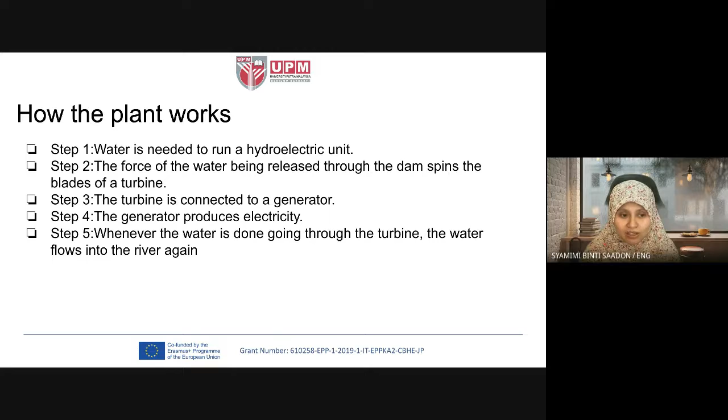Whenever the water is done going through the turbine, the water flows into the river again. The turbine spins, the blade of the turbine spins, and the turbine is connected to the generator to produce electricity. Thus the rest of the water will flow again into the river, and the cycle continues. That's generally how hydropower works.

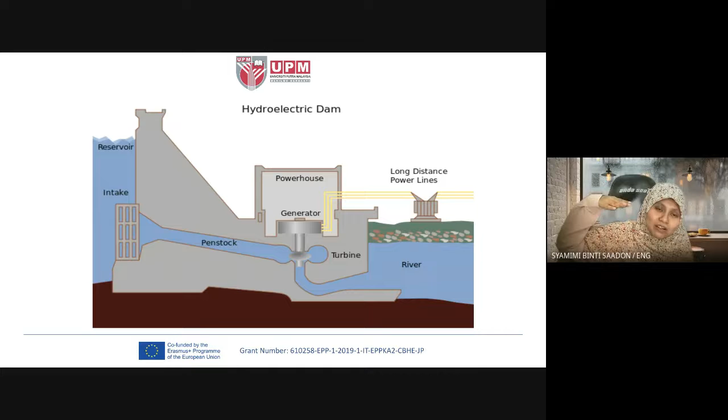So this is a presentation as an example of a hydroelectric dam. From the reservoir at a higher altitude, the water will flow and cause the turbine to spin. The blade of the turbine will spin, and the turbine is connected to a generator, thus it will produce power.

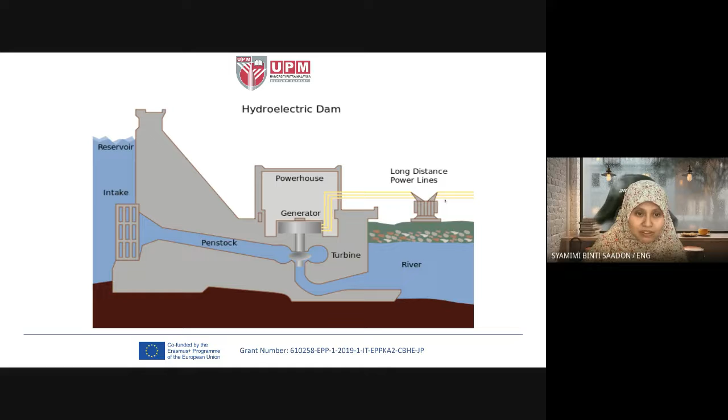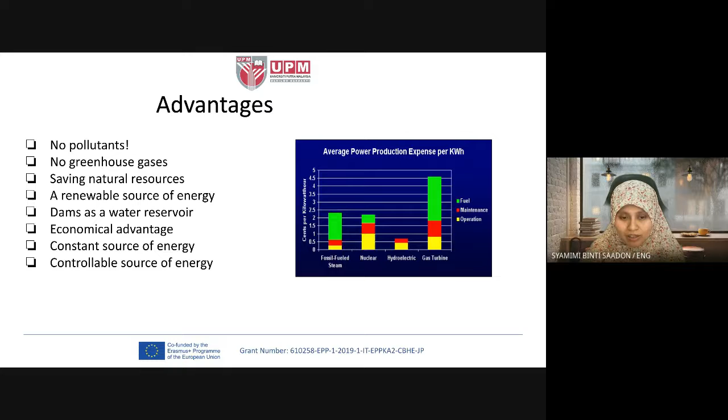If you compare the average power production expense per kilowatt hour with fossil fuel, nuclear, gas turbine, hydroelectrics basically use fewer cents per kilowatt hour, due to the maintenance and operation cost. It doesn't need any fuel.

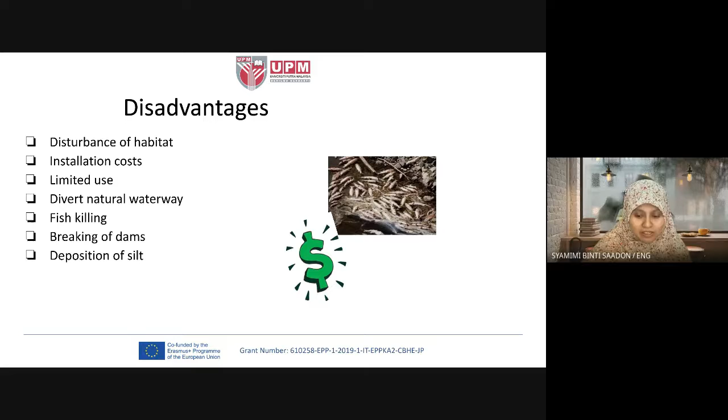Three Gorges Dam located in People's Republic of China, the largest dam in the world, spans the Yangtze River with all of its 32 generators. It can produce 22,500 megawatts, so it's actually 22.5 gigawatts. It caused problems because it flooded over 1,300 archaeological sites and 1.3 million people had to be relocated. That is the disadvantage of this hydroelectric power plant.

It caused flooding. Another one is between Brazil and Paraguay, in South America, the Itaipu Dam.

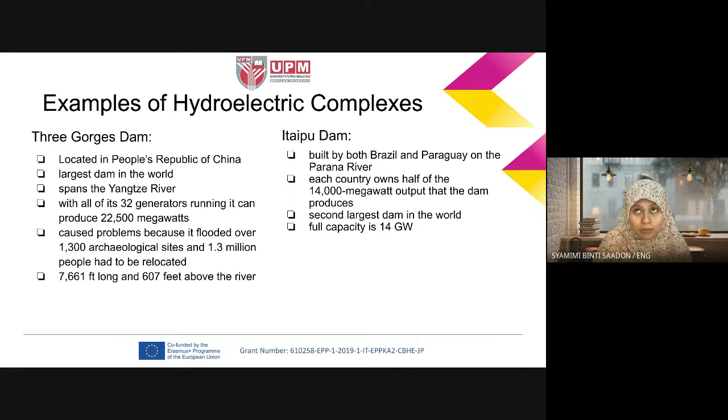This hydroelectric power really depends on gravitational force. A higher level of altitude means higher stored energy, higher potential energy. The higher it is, the more stored energy it has. So water must fall from a higher elevation to a lower one.

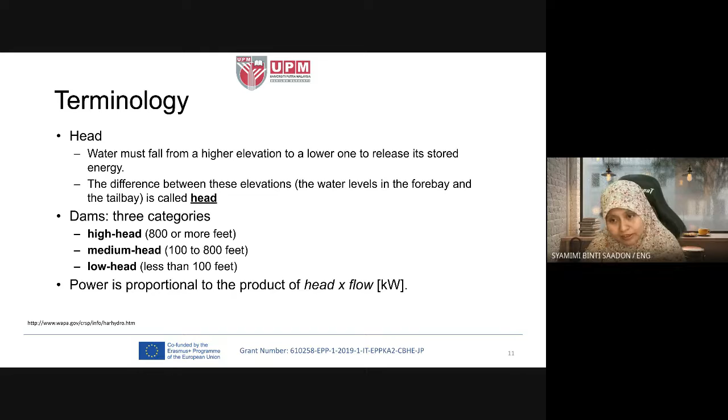Dams, or 'empangan', have three categories for hydropower. 800 feet or more is what we call high head, medium head is around 100 to 800 feet, and low head is less than 100 feet.

How do we calculate the power produced by hydroelectric? The power is the product of head times flow. Flow is normally in meter cube per second, and head is in meters, representing the elevation height.

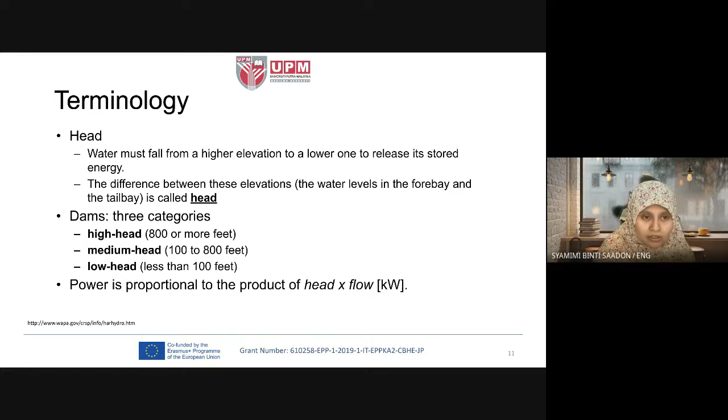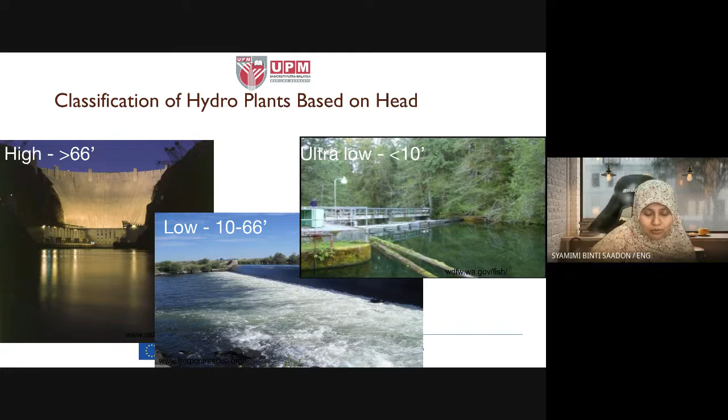This is an example classification of hydro plants based on head. In these figures we have high head at 66 feet and higher, large dams, then lower dam, and ultra low, low dam. You can see the elevation here, how high it is.

Types of hydroelectric installation. Different head, different elevation of head, means different types of installation. Different head elevation means different installation designs.

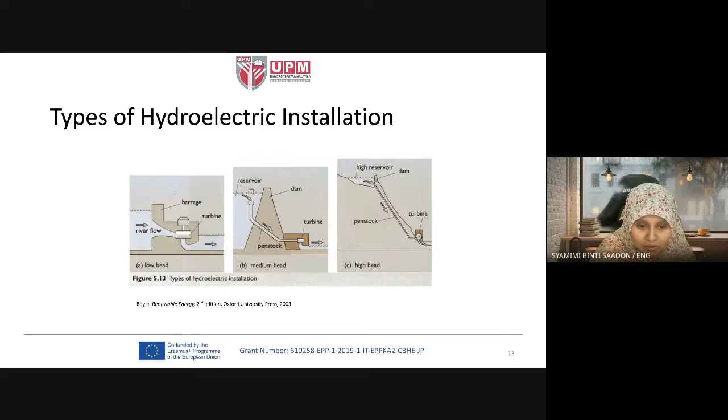The first one is low head, which is kind of direct from the river to the turbine, continuing to flow down to the river. Medium head needs a penstock to flow the water from the reservoir, and the high reservoir type is like this. So the installation is quite different depending on the elevation level of the dam.

Just now was about the level of elevation. This next part is about the scale of hydropower produced, ranging from large to pico. We seldom hear about pico hydro. Large hydro can produce around 100 megawatts into a large electricity grid.

The two examples mentioned previously were in China, and in Paraguay and Brazil in South America. Those are examples of large hydro, of course.

Medium hydro produces around 15 to 100 megawatts, small hydro 1 to 15 megawatts, and then there's mini hydro, micro hydro, and pico hydro, depending on the application.

This is an example. Hydropower is used in two ways: direct or electrical generation. Direct means the energy produced by the water, stored from the water, is being directly used for any application.

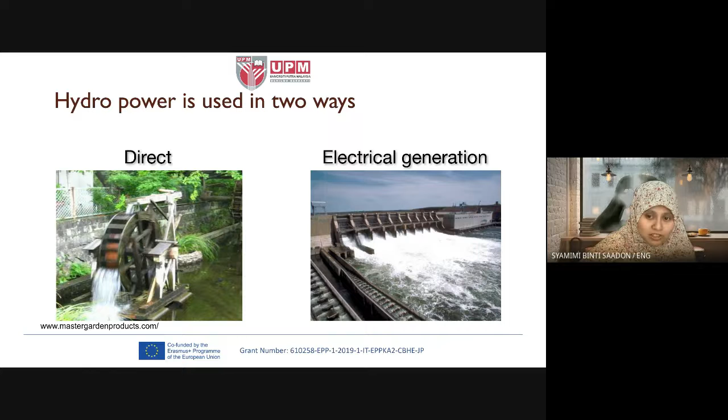Electrical generation means the energy from the hydropower runs through the turbine, and the turbine is connected to a generator, which then produces electricity.

This is some of the direct use of hydro energy, basically in rural areas, for textile manufacturing - for making fabrics, we can use hydro energy for this.

And then for grist mills, grist pasir, kilang buat pasir, manufacture pasir, and then we also have kilang papan, sawmills, which can use direct hydroelectric power. Okay, and then we also have irrigation, sistem pengairan, for penyaluran air, basically in the rural areas, so they can use this direct use of hydro energy to supply power to manufacture textile, grist, pasir, sawmills, kilang papan semua.

Okay, and types of hydroelectrical generation. Kalau hydroelectric power using hydroelectric generation, first of all is the impoundment, macam sistem penahanan air tu. Pump storage capacity, run-of-river, diversion. So basically yang besar-besar sikit lah. So these are the examples.

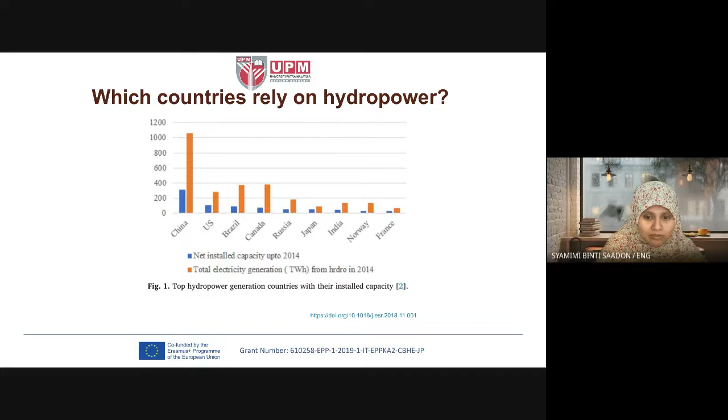Okay, so which countries really rely on this hydropower? So basically first one is China, US, Brazil, Canada. Some of the European countries, Russia, Asia Pacific, Japan, India, Norway, and France. So those are the top hydropower generation countries with their installed capacity, as of 2014. This one is the latest that I have found, maybe there are some more latest. So around... terawatt hour, this one.

Okay, so basically what I wanted to focus on is the hydropower due to water dekat empangan sungai, but I include a bit since the source is the same, which is water. So I include here other potential new sources of hydroelectricity, which is tidal and wave. But actually tides and wave jatuh di bawah ocean energy sebenarnya. Ocean energy, not basically, it still can be considered as hydropower sebab hydro kan, water juga source dia, tapi mechanism dia lain sikit. So basically kalau kita tengok, biasanya tides dengan wave ni dia termasuk bawah ocean energy, not directly bawah hydropower. But it's okay, I just introduce a bit about this tides and wave.

So tides ni macam air pasang surut, pasang surut air kan, and wave pula ombak lah.

Okay, so tide power. Pasang surut air ni boleh generate renewable energy source juga, based on daily movement of water in oceans. Tide dengan wave ni datang daripada ocean. Walaupun dia still water, air, tapi tide dengan wave ni biasanya dekat ocean, dekat laut. Tadi kalau macam hydropower yang tadi kita tengok tu basically dekat sungai, kat empangan. So based on daily movement of water in ocean, kejadian pasang surut air tu boleh menghasilkan power energy.

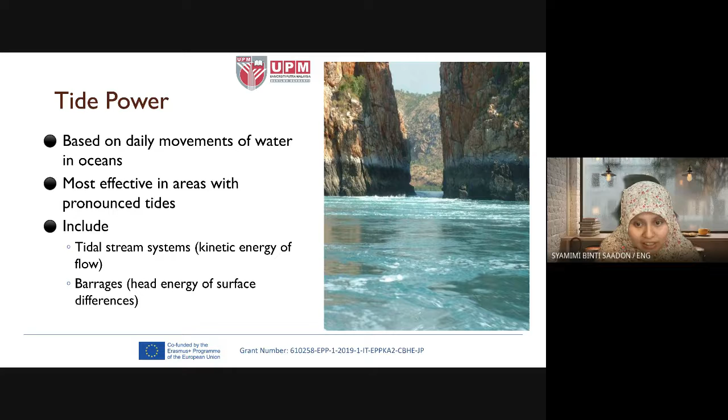Okay, so tide power includes two types of energy mechanism, a source. Dia punca dia datang daripada dua: satu daripada tidal stream due to the kinetic energy, satu lagi daripada barrage due to the head energy ataupun potential energy, ketinggian elevation yang berbeza. Okay, so tidal stream system, this is an example of a system, tidal stream yang due to the kinetic energy tu. Dominant technology is shrouded turbine.

Prototypes have been tested in England, Australia and Italy, outputs up to 1.2 megawatt are noted. Okay, so macam 1.2 megawatt tak adalah banyak sangat berbanding dengan tadi tu kan. Any barrage system depends upon impoundments built along coastlines. Sistem penahanan tu yang dekat coastline developed in Canada, Russia and France. Basically kat negara lain atas tu lah kan. Okay. Largest generates 240 megawatt, so lebih besar, limited by geographic environmental considerations.

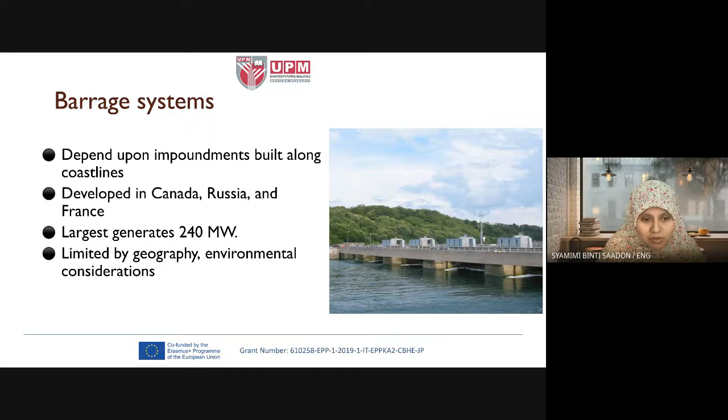And then we have wave, okay, ombak. Power, hydropower hydroelectric due to the wave power. So based on up and down motion of sea surface, so motion pergerakan, kinetic energy can be captured using a device that converts motion to electricity. Once we have a device yang boleh convert kinetic energy ni to electricity, macam turbine tadi, turbine dia convert kinetic energy to electricity kan, bila dia connected to the generator, create more electricity than tidal, so boleh jadi dia lagi dapat banyak lagi. Recently developed a system include around 2 to 3 megawatt.

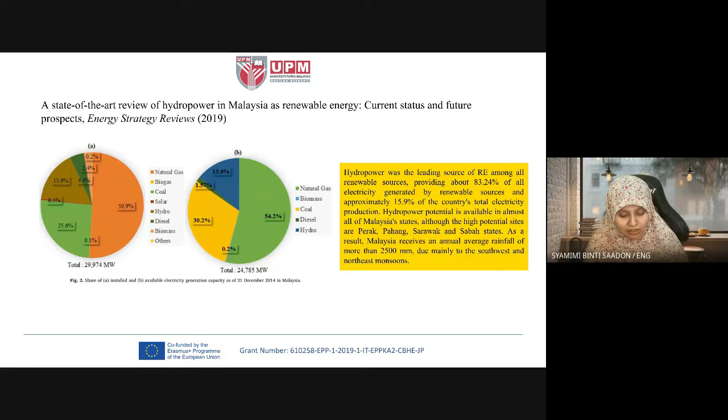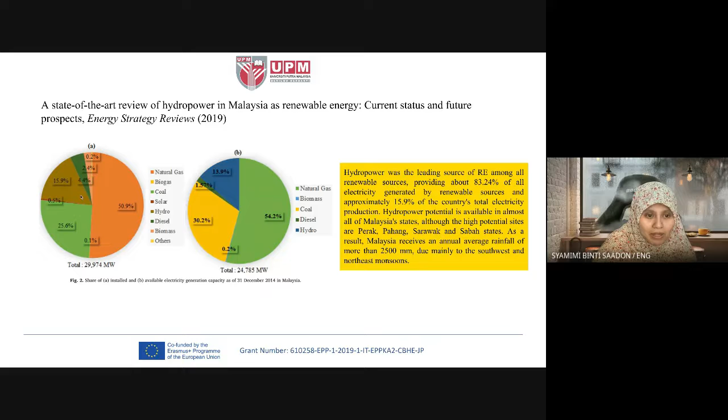So from this paper, journal, a state-of-the-art review of hydropower in Malaysia as renewable energy, current status and future prospects from journal Energy Strategy Reviews in 2019. So you can look at the journal, you can search this journal. So basically if you look at the pie chart here, share of the installed and available electricity generation capacity as of 31st December 2014 in Malaysia. So basically installed electricity generation in our country, majority is still from natural gas. But we can look here, second is coal, but hydropower is third, around 15.9%, which is 16%.

And then available electricity generation. Still natural gas is the majority, and then we have coal and hydro 13.9% or 14% as the third source of available electricity. So hydropower was the leading source of renewable energy among all renewable sources, providing about 83.24% of all electricity generated by renewable sources and approximately 15.9% of the country's total electricity production. Okay, so kalau compare dengan other renewable energy source, hydropower yang leads lah, sebab natural gas dengan coal is not a renewable energy source.

Hydropower potential is available in almost all of Malaysia's states, although the high potential sites are Perak, Pahang, Sarawak and Sabah states. So those are the states that has sungai banyak kan, besar kan. As a result, Malaysia receives an annual average rainfall of more than 2,500 mm due mainly to the southwest and northeast monsoon. So monsoon apa ni? Southwest monsoon, barat daya. And northeast monsoon, timur laut.

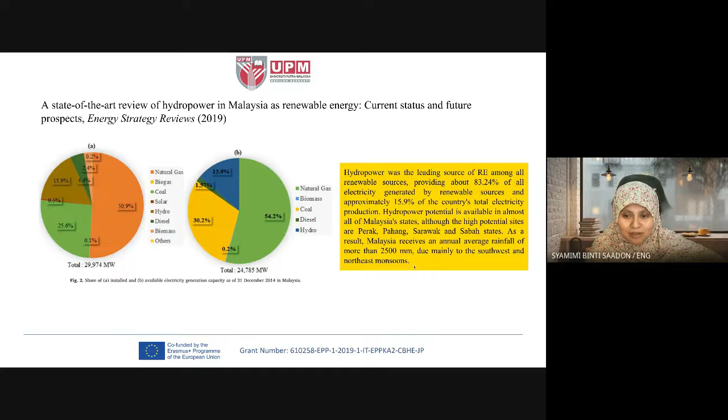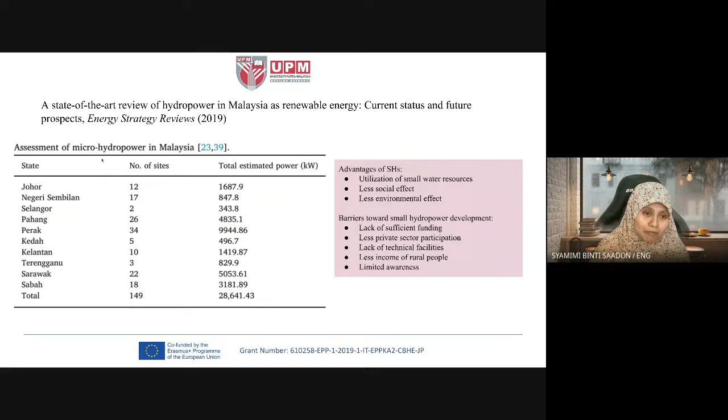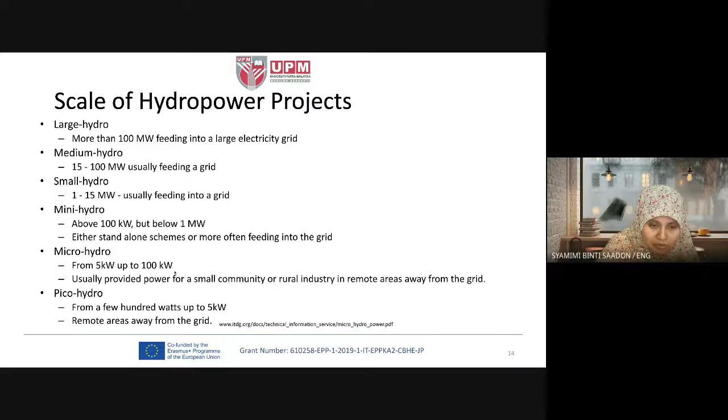Okay, a state of the art review of hydropower, sama lagi. Assessment of micro hydropower in Malaysia. So these are the numbers for micro hydropower. So micro hydropower, the production is around 5 kilowatt up to 100 kilowatt. So tak adalah banyak sangat, but it's okay. Micro hydropower.

Assessment of micro hydropower in Malaysia, number of sites, so ada 12, so banyak total around 150 lah in Malaysia. So untuk micro hydropower kita dah ada quite banyak juga, cuma yang the bigger one kan, yang belum banyak lagi lah. So yang micro hydropower ada banyak dah ni, around 149. So with total estimated power 28,641, which is around 28 megawatt.

Okay. So advantage of small hydropower, essentially utilization of small water resource. So even though we have a small water resource, we still can create hydropower, electricity. Less social effect, less environmental effect. Okay, barriers towards small hydropower development. Apa dia punya disadvantage ataupun not actually disadvantage, but halang-halangan dia.

Lack of sufficient funding. So of course always funding. Okay, like less private sector participation. Kena invite lagi banyak lah NGO dan private sector untuk terlibat. Lack of technical facilities, less income of rural people. Okay, limited awareness.

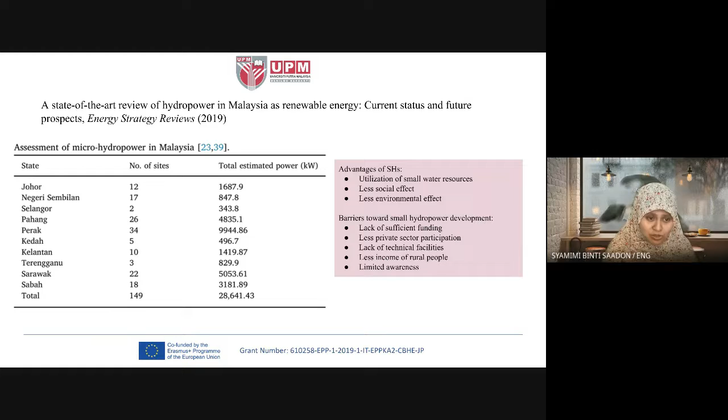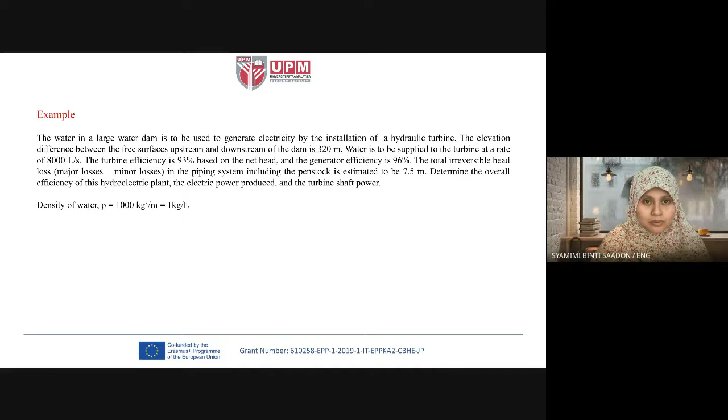Okay, so I have finished introducing to you about this hydropower. So I just have this one example exercise, so that you can understand better how this works. Okay, wait, I'm going to create a whiteboard. Okay, so this is the link for the whiteboard. You can try to go and okay.

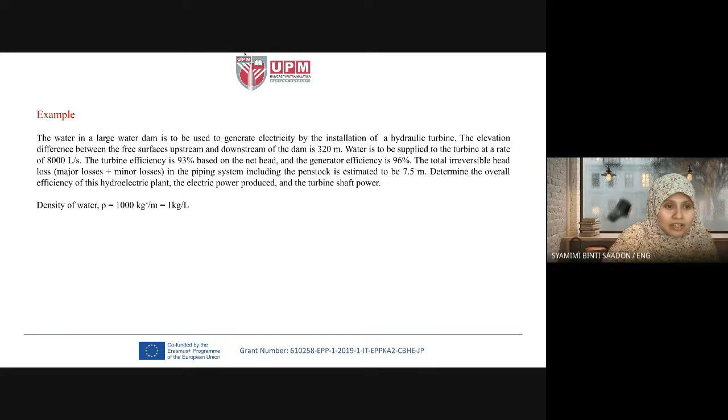Sekejap, sebelum tu, we read first the instruction. The water in a large water dam is to be used to generate electricity by the installation of a hydraulic turbine. The elevation difference between the free surface upstream and downstream of the dam is 320 meters. Water is to be supplied to the turbine at the rate of 8,000 liter per second. The turbine efficiency is 93% based on the net head, and the generator efficiency is 96%.

Okay, turbine tu dia connected to the generator. The total irreversible head loss, major loss and minor loss, in the piping system including the penstock is estimated to be 7.5 meters. So since dia agak tinggi, medium to high level of dam, dia kena ada penstock ni. So ada piping, piping ni ada loss lah. So head loss dia 7.5 meter.

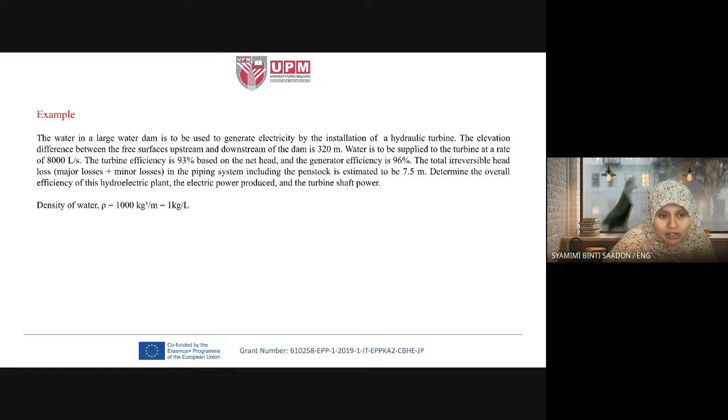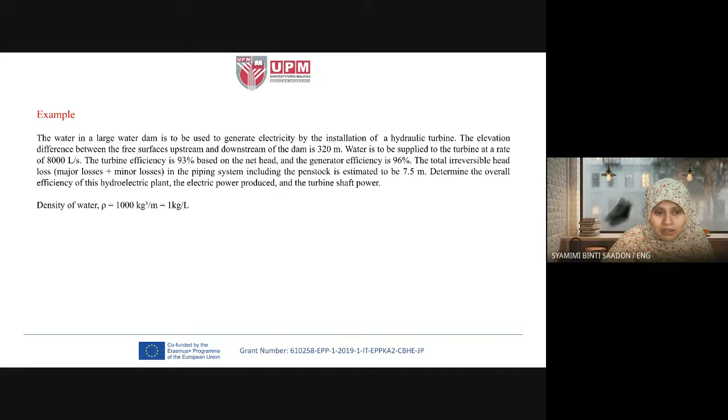Determine the overall efficiency of this hydroelectric plant, the electric power produced, and the turbine shaft power. So there are three things that we need to search for. We use density of water 1,000 kilogram per meter cube or 1 kilogram per liter. So let's look at this example. First, we want to calculate overall efficiency of the plant.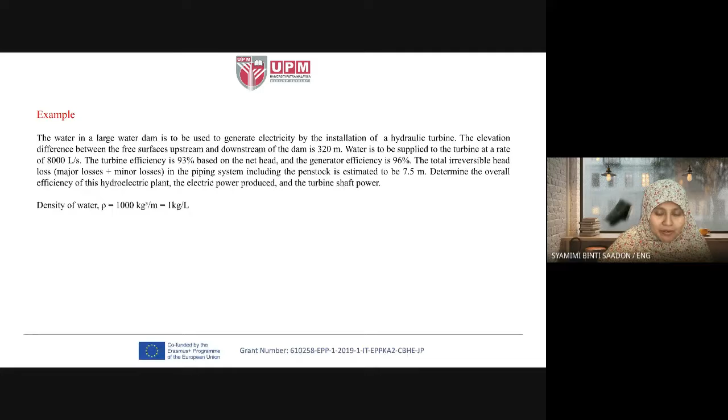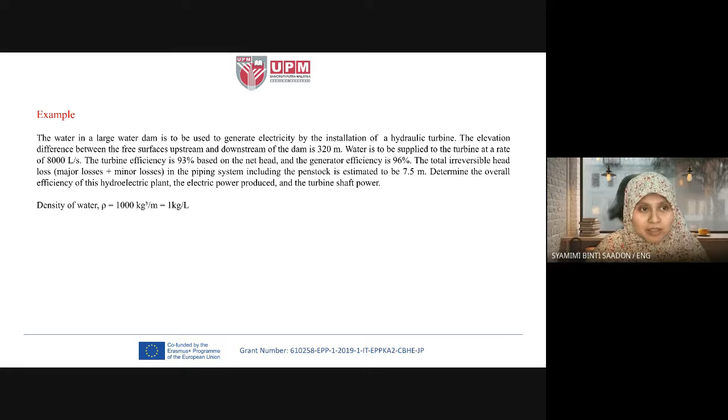We are given with the turbine efficiency and generator efficiency, and we want to calculate the overall efficiency. Normally, for efficiency we multiply. Overall efficiency is the turbine efficiency, generator efficiency, and of course the efficiency due to the piping. So here the turbine efficiency and generator efficiency are given, so settled.

Just that we don't have the efficiency of the pipe. The one that we are given here is the head loss in meter. Kita tak diberi efficiency dia, kita hanya tahu head loss dia dalam meter. So we have to search for this piping efficiency. Since we are given with the head loss, kita tahu yang loss, kita tak tahu yang tak loss. Faham tak? So kita kena tolak.

This is energy due to mechanical loss of the piping, energy loss over the maximum power that can be provided through the piping. I repeat again, since we are given with the loss, 7.5 meter head loss tadi tu.

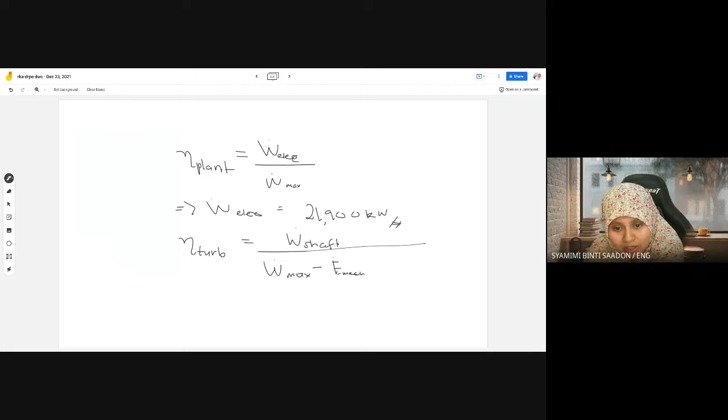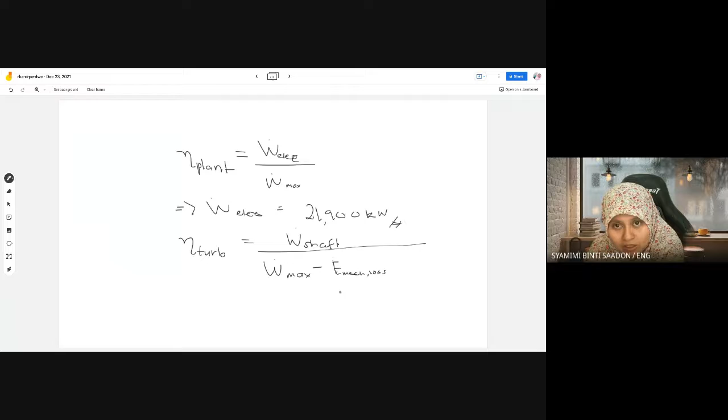Third one, turbine shaft power. The efficiency of the turbine we know, so kita guna je. Shaft power yang kita nak cari. So how much work power is given to the turbine? Power given to the turbine is daripada asal max tu, tolak loss tadi. This is the initial stored potential energy, this is the loss in the piping. So tolak loss, kita dapatlah power input to the turbine.

So here kita nak shaft power, sebab turbine efficiency is already given. So we have shaft power around 22,800 kilowatt, or 22.8 megawatt. So those are the answers.

So you can try on your own, look at the example of the exercise. I think that's all from me for this week's class.